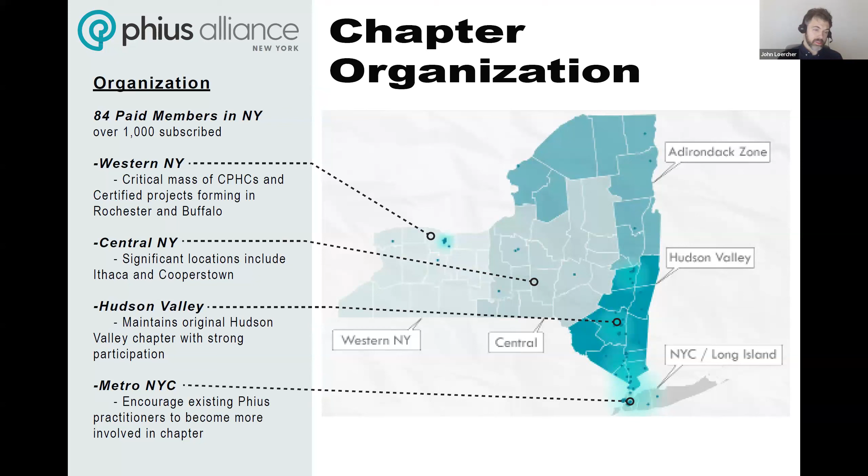All right, almost there, guys. This is our big announcement. You may have seen through the Passive House Accelerator, some other Passive House groups - Reimagine Buildings will be occurring in March of 2024. This happens to align with our spring quarterly meeting, and we're hoping to have an in-person event to supplement this 24-hour online event. This is a global event where we'll be hearing about Passive House projects from around the world. We are working with the Accelerator and NYSERDA to specifically program a segment devoted to New York State and the projects that are going on across New York State.

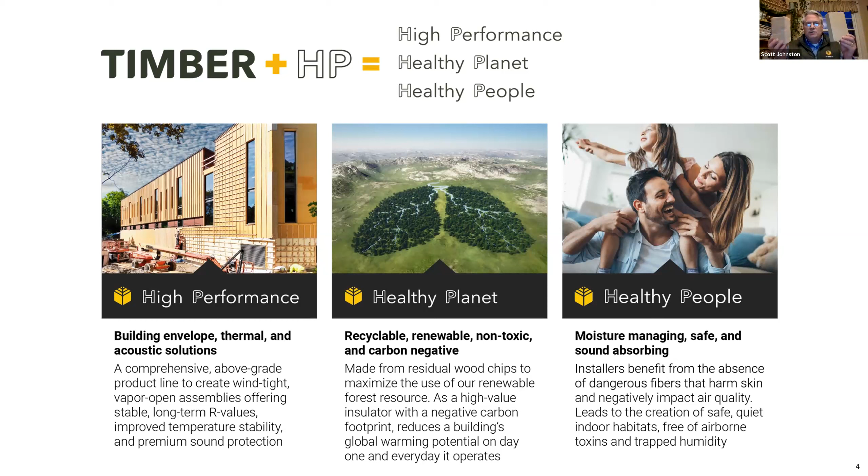Healthy people's a no-brainer, right? We build the houses as we do today - we've got to make sure that living space, that air they're breathing in, is of quality. The other fact that's near and dear to my heart is the materials themselves for the installers - they can feel it, touch it. There's not a lot of protection other than an SDS that tells you to wear a paper mask when you're cutting and blowing into the attic. It's an incredibly different experience for those installers than what they're used to today.

So that's really our go-to-market strategy. Here's where I'm going to be fairly quick because this audience knows this - you guys can speak to this. I really want to get into what the product looks like, when is it available to use, where can I buy it? But really, we all know this: 40% of buildings are contributing to the carbon.

And what I'm seeing and hearing as I travel to places like Texas, or the NESEA event down in New York City, or AIA, it's okay - we've been dealing with the operational carbon for years and doing a pretty good job. Particularly this crew here has done a fabulous job of getting that operational piece addressed. But what are we doing with the embodied carbon?

In that mission video that Paige will send you, there's a really cool dynamic between Josh and Matt. Matt says, I'm building this really wonderful building based on these design intents, and Josh, who has no dog in the fight so to speak, says, but I'm confused because that material you're using on the outside with the continuous insulation is very highly indebted on the fossil fuel side. It's a very interesting dialogue.

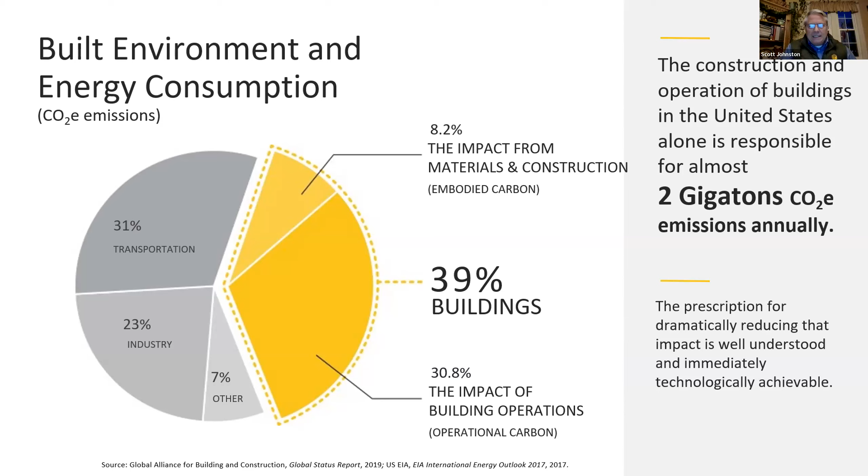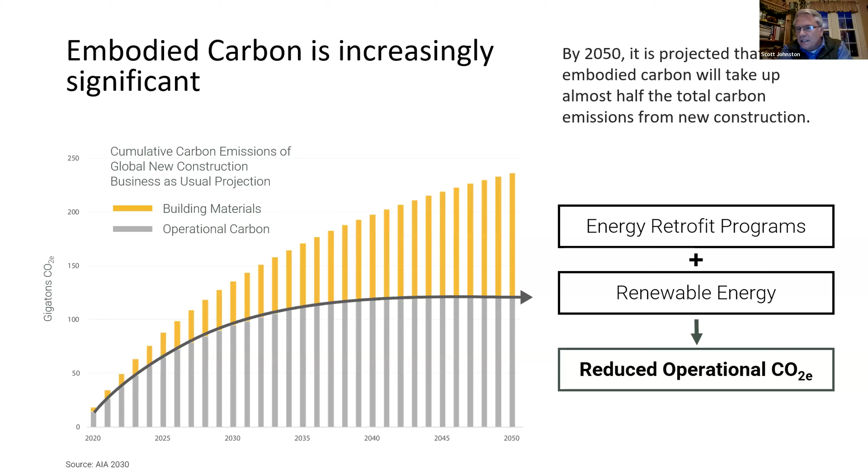Embodied carbon is something we need to think about, because as we continue to drive down operational consumption, what are we doing in all facets of the specification of a building? Here I speak to insulation. Is there something we can offer here in the United States that's affordable, hits the R value points, has the durability, addresses code, but also addresses embodied carbon? That's really what we believe wood fiber can do here in the United States. It's the second highest category that needs addressing, because it contributes quite a bit with regards to embodied carbon.

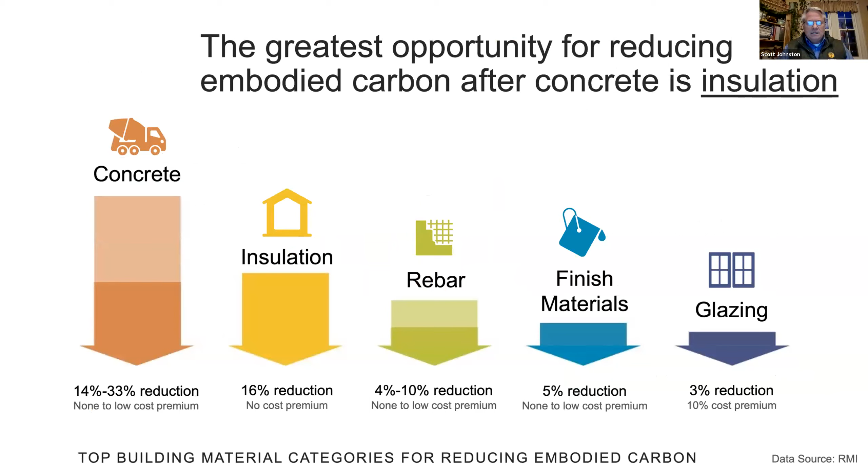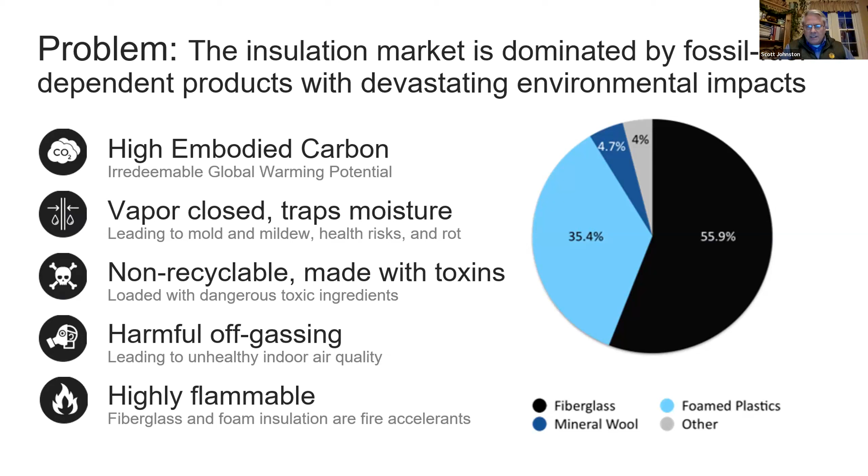This is just something to show you. I'm not here to get on a holier than thou piece, but in this category we use materials for all the right reasons—their insulation values, maybe it's something we're putting under a slab or up against concrete for durability, or commercial for non-combustibility, etc. There's many reasons. Again, wood fiber isn't going to cure all of it. Our wood fiber only fits into a certain segmentation of the market, but certainly in this category there's areas of improvement that can be had, and this is a significant contribution.

Most everybody on this call, I'd be shocked if you hadn't been following the European products for years. Many of you have probably utilized these products coming out of Europe and shipped into the United States. But to finally have wood fiber here in the United States gets rid of that boutique piece—we no longer need to ship it on a container, or worry about the impact in terms of getting it to the job and scheduling. The big thing here is, if you look at spray foam and XPS—there's certain instances where you need to use these things—but that's a 6 to 8 year operation to offset that embodied carbon.

So we're really excited to give some options out there, not just for folks like yourself. I want to make sure you realize we're working hard to make it affordable for mainstream. I'm really psyched to be working with some folks on affordable housing—their budgets are really tight, which is kind of fun. Also, and I signed a non-disclosure, we're working with a large production builder that's looking at this as well, which is cool.

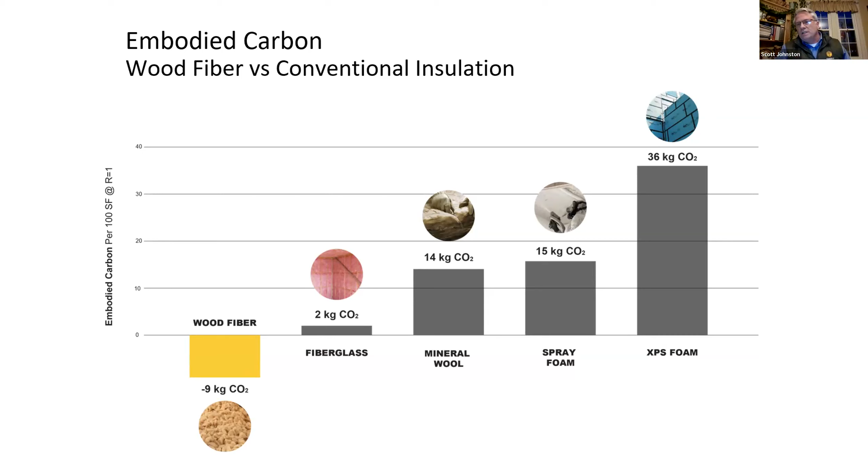Our raw material, like I said, is abundant. Sadly, all the paper mills—there's only 3 left, 16 at one point—all shipped off to other parts of the globe. Our equipment that was in our mill, and I'll show you photos of the mill at the end, all was shipped over to Asia. We imported our equipment from Europe, mostly Germany, to put back and be ready to make this wonderful wood fiber. Ironically, the same feedstock that made high glossy insert paper is the exact same feedstock we use, so we're able to reconstitute that relationship with the forestry industry, which is super exciting to us.

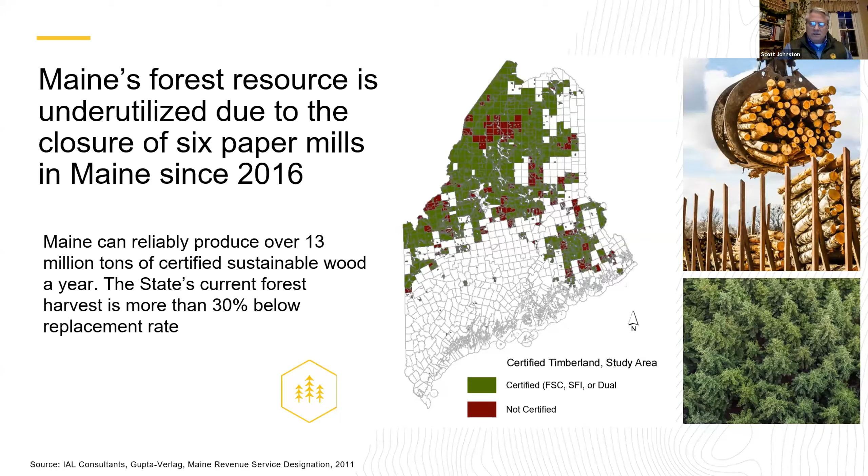Here in the United States, there'll be other folks besides Timber HP that get into this category, and I think that's fabulous—we need it. We have such an abundance of raw material in the United States for softwoods. Anywhere you see timberland, production facilities can be stood up to make the blown-in alternative to cellulose with our wood fiber, the batts, and the continuous insulation. So a great trajectory here.

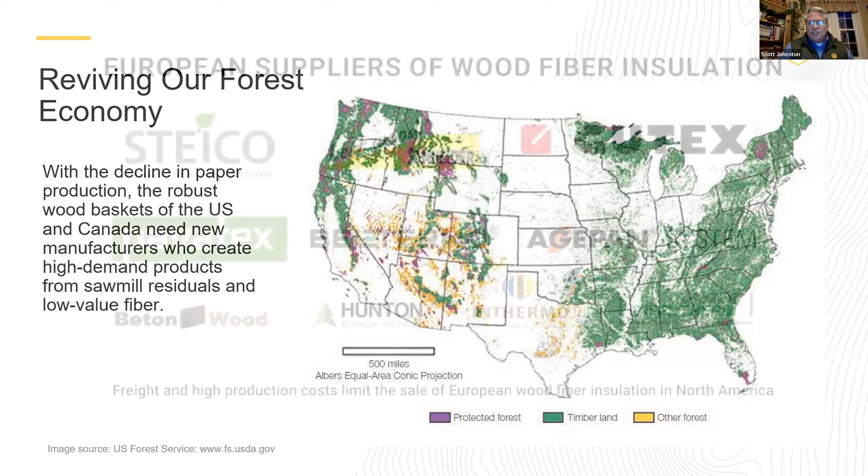John, I'm going to put you on the spot from a time perspective. I'm going to assume most of these folks are very much aware of these brands. I had a 2 to 3 minute video showing these products being installed, little snippets—be glad to show it, but you tell me if you think this audience is well beyond that. I don't think there's any harm in showing it. We have a little over 10 minutes.

Okay, good. Then I will do that, and we'll have a little jazzy music in the background, and here we go.

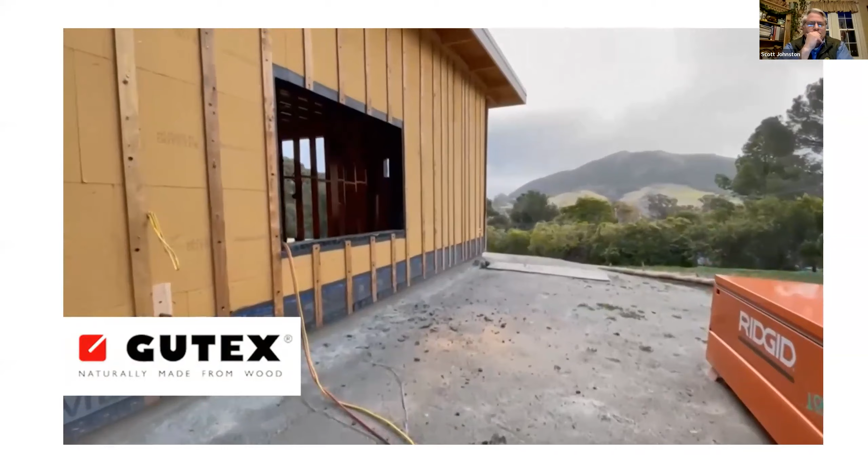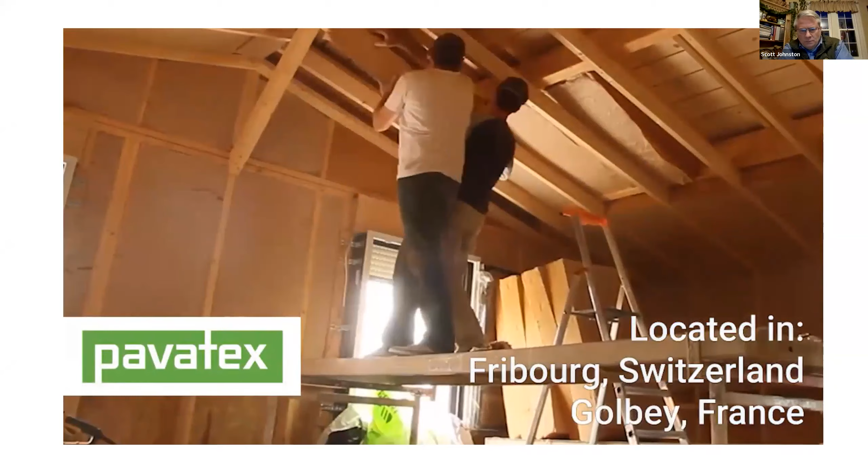Did that music play through for everybody? Yeah, it's going to be stuck in your head for a little while. But I think it does a fabulous job.

If we had more time, we'd ask what did you see there that was unique and different. The only thing I'll leave you with is I love the guy with the face mask just dangling from his neck. Typical guy, what can I tell you.

This is the essence of the manufacturing. I came from the wood window and door side, and there's a lot of complexity to it. The engineers would kick me for saying this, but really, if you look at this piece for wood fiber insulation, it's pretty straightforward.

The cut section they're seeing, somebody upstream is going to use that tree that's brought to their facility, and they'll debark it for bark mulch. They'll yield as much off that tree as they can for dimensional or decorative trim. What they've done in the past is sold that chip off to the mill, or it might be burned off in biomass. So there's an abundance of this softwood species up there for us.

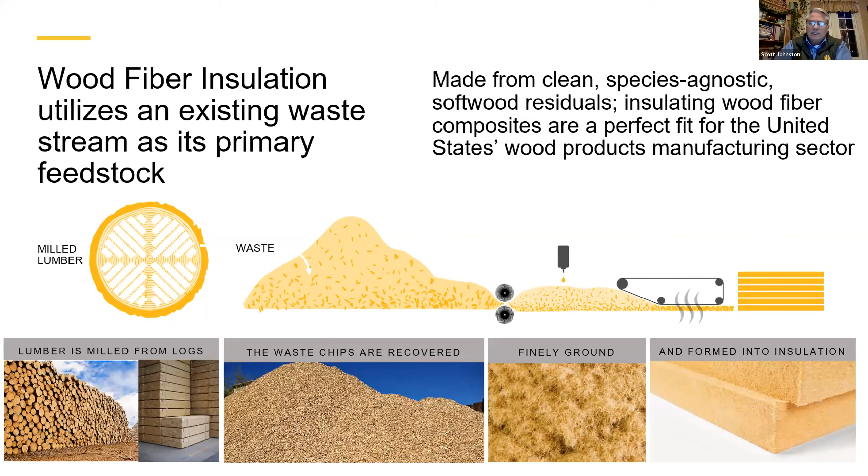We utilize it. The trucks are blowing past our facility because we're right in the sweet spot for the forestry industry. We're going to add some additives, we'll talk about that briefly, but it's a pretty straightforward process. Carbon storing, high performance, recyclability, non-toxic, safe.

I'll say this because this is a sophisticated group. We're going to immediately get online for the production. When we make the fill, the batt, or the board, we're first and foremost going after ASTM and code compliance. Then the second tranche of work, which takes 9 to 12 months, is life cycle analysis, declare label, all of that's coming, so be patient with that. But that is a no-brainer for us, we've got to do that.

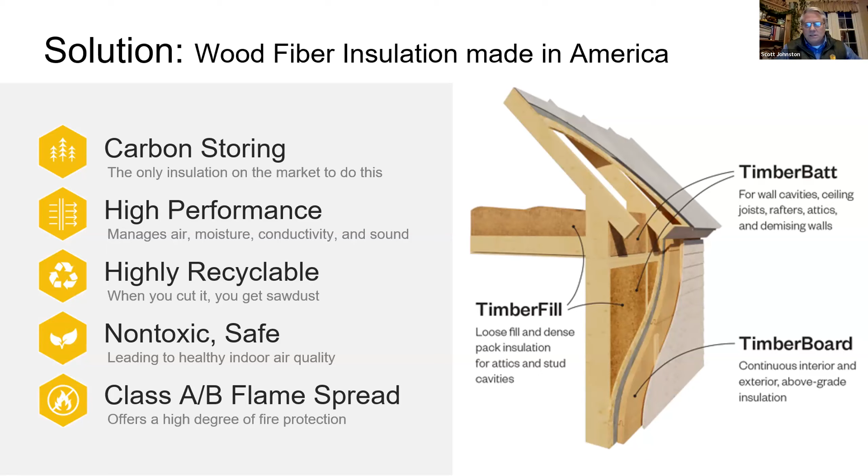And then, of course, Class A, Class B, we are for both the fill and the batt. We're an ASTM E84 flame spread A. So primarily anybody doing combustible type 5 residential, good to go. We're also going to be able to be in type 3. Just be mindful of that NFPA 285 and less is where the sweet spot is, but also into the CLT.

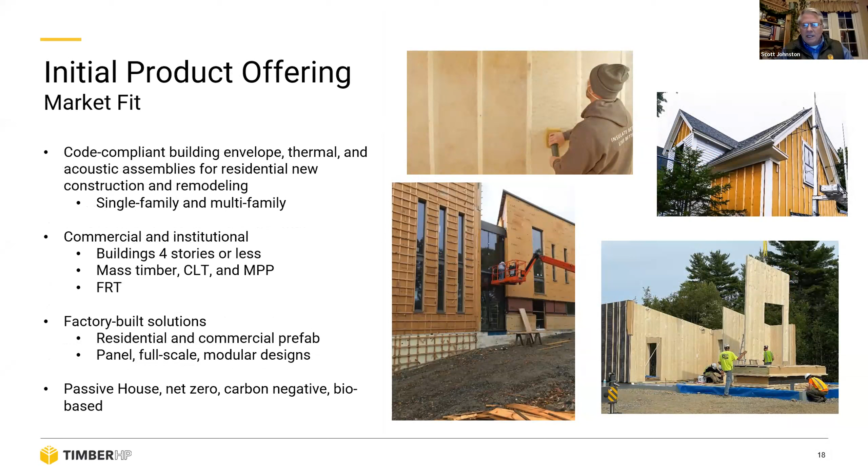We'll be able to produce in the summertime. We'll have a board for you as well, and I'll get more detailed on the timing of that. Timber fill is just a straight up 100% alternative to cellulose. We are in the market now, good to go for your market.

We've got Cameron Ashley. That name may mean nothing to you, but the importance is that we've got a distributor selling it to all the large installers that come out as hired guns to blow in cellulose on your projects. They all have access to us, so lots of work has been done there. It's really a one-for-one — if they've been blowing in cellulose material, their equipment works. We've got training videos, spec sheets, all good to go.

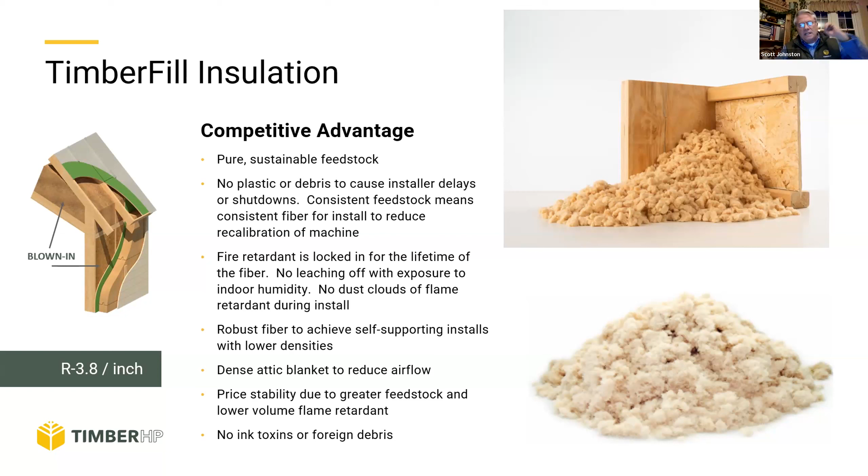But we're only using borate — a liquid borate — infused into the wood fiber. So when they're blowing it into an attic space, it's not coming off the product. 3.8 per inch in a dense pack wall. I'm going fast because of time.

The bat is exciting. We have the equipment up and running, and we're looking to launch the bat in January. We're going through the final code compliance, ASTM testing, R value and such. So it's super exciting — this piece that I have was made in the plant a couple of weeks ago.

R4 per inch, again, all softwood species. The only additive here is borate, as we mentioned, for fire, bugs, and water, and we're using a little bit of a PMDI resin, which is a polyester piece. We're looking to eventually get rid of that. We looked at bio-based adhesives, but they require more fuel to make than the polyester needs. It's a bi-component process, like a huge toaster oven, and we're trying to infuse that into the product to get the density and the R value necessary to hit those R value targets. That's it, so it's wood and those other two components.

Very easy to work with. We have all kinds of cutting tool suggestions, and we'll actually have those readily available at the lumber yards. I'm not wearing gloves, you can just brush it off. I do recommend you use a paper mask when you're cutting quite a bit, but we're really excited about that.

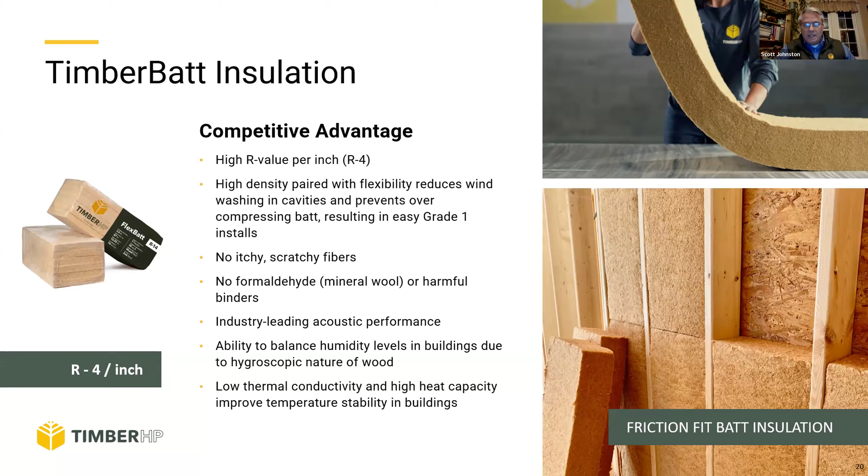The board is a bit trickier, a lot more things to do to make that. We have the equipment in place, our contractors are bringing it to life now. Q1 will be bringing it to life, producing it and slowly getting those testing parameters done. We're hoping, praying that we're looking at a spring time frame for this.

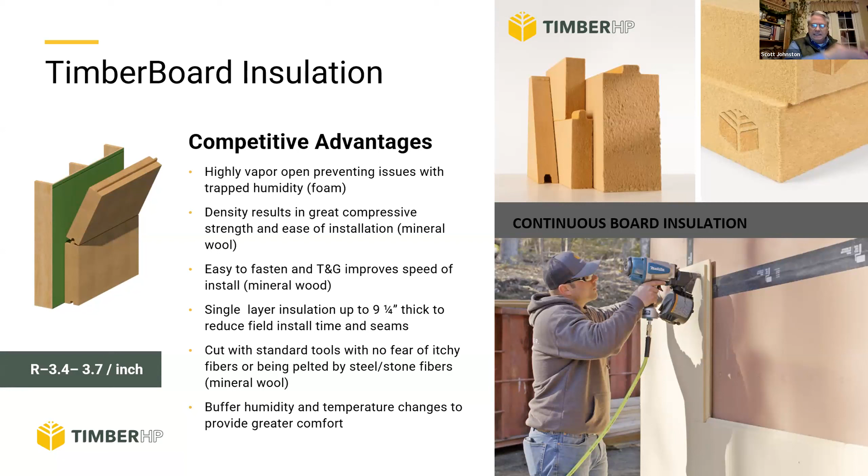All 3 of these products have 3-part specifications on our website. It's on ARCAT. We're working with a whole host of designers, architects, engineers, and developers, and we already have a lot of these products in their specifications, available to you right after this call. All the products we're doing are really nailed down based on codes, so it's plug and play - what's my cavity need to be, in New York I need this, what's my board - all the data we have should be very straightforward for you.

Thermal management, I mentioned this earlier. Really, that middle shear, that sheathing in the middle, that white piece there is the outer plywood or OSB. That's what you're going to continue to do, what you've done before. What does my shear strength need to be? What's my preference for my WRB, my water, bulk water, air, etc. The exterior board is purely thermal. We'll have a lot of suggestions for you. We have a manual in design now, Joe Lstiburek is helping us with that. But yeah, that's the open assembly that we talk of.

The wood fiber can hold upwards of 15% in weight and still perform at the published R value. When it dries out, it dries out without any degradation, so it's very, very durable. And it's vapor open - we have about a 40 to 70 perm rating with these various products.

Obviously on the outside we treat that a little bit differently. There, we're not putting borate in, we're using an MDI resin, which is what the OSB panel folks use. That's for durability, giving us really great compression durability. If you've ever worked with mineral wool and put your rain screen on, you worry about the torque - here, this gives us resistance. So that trade doing the cladding work, we reduce the telegraphing concern because of the PSI durability.

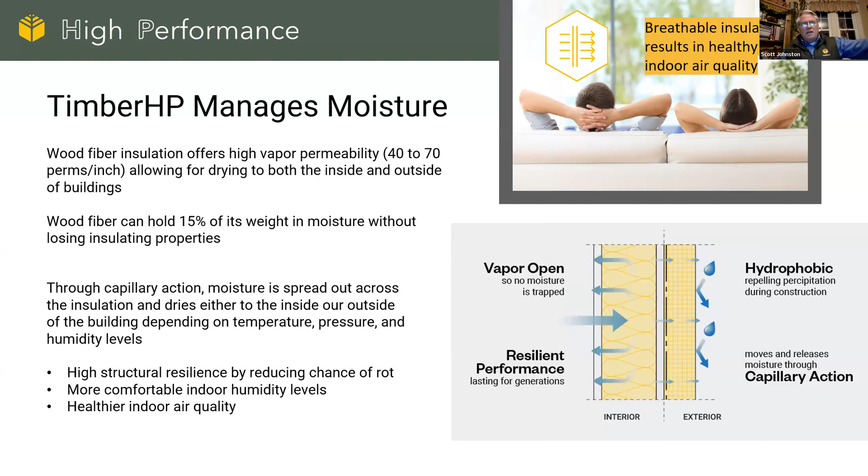And then we're using paraffin wax because we've got a 6-month exposure rating on that board on the wall, and 3 months on the roof, and then it's monolithic. So if I take a claw hammer and chunk out a section of this, not to worry, as long as it's not catastrophic, the MDI and that paraffin are still there, so as it's still being weathered, we haven't compromised the product.

Paige has been having a ball out there, getting on some job sites, doing a lot of training. You might go to some retailers and bring up Timber HP products and they might go, what? There's still a lot of work at that level, but Paige is who you want to call to triangulate on where's the closest source for me. Our goal for everybody on this call is independent retailers.

Not everybody's going to jump at it. There's certainly, as you know, a lot of folks that have been early adopters for other products that you procure, but we want to work through independent lumberyards and those other distributors that I mentioned that do the blown-in insulation.

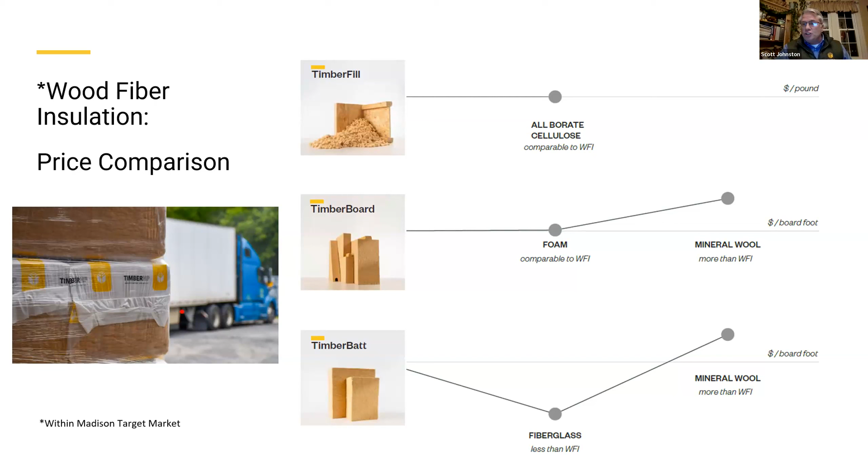But that's not who we play in. We play against the mineral wools, and I think you'll see that we'll be in good shape there as well. So we're really excited about that.

Just a couple of factory photos, and then I'll stop because I know you have a lot more to do. That's the rendering upper left. There's another drone of the actual facility when it was bought.

That river that you're looking at is very angry right now. Good to report that no damage done to our main plant. Some of our annex buildings did take some flooding and such, but all of northern New England, and you guys probably in New York too, I mean the last 2 days were pretty painful.

But we'll take back this 400,000 square foot facility, and in 2016, 150 people lost their jobs. At full production, we'll be up to 125. We're at about 75 now, and of course the impact locally is going to be fabulous.

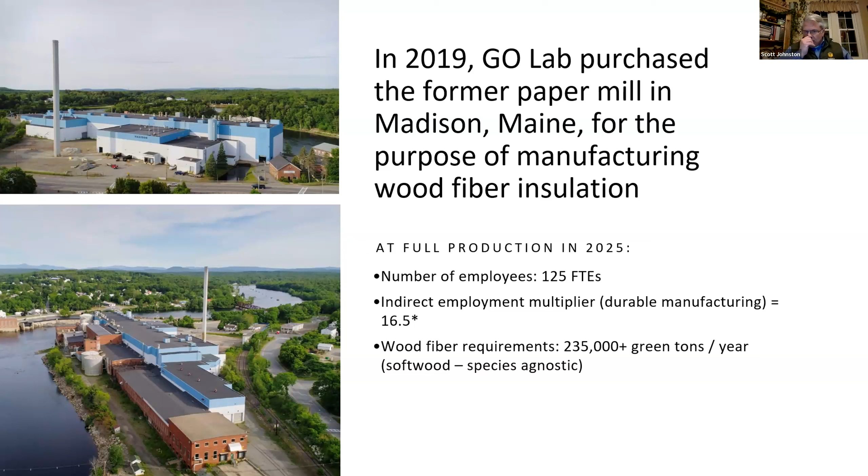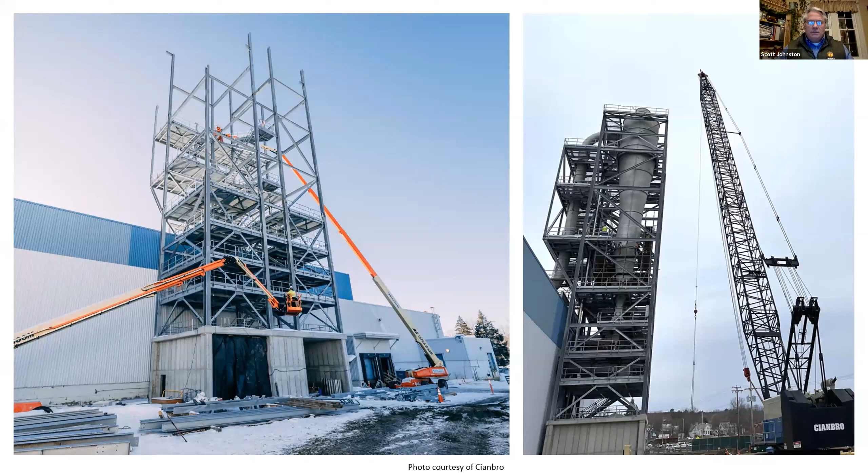So here's some of the construction work. Stantec Engineering repurposed this mill. This was built in 1986 by Cianbro. If you're not aware of them, they're really a great firm here in Maine, and they're growing. But they are repurposing the mill that they built in 1986, built off Stantec's work.

And this is kind of a closer photo to what it looks like today. So it's a big operation.

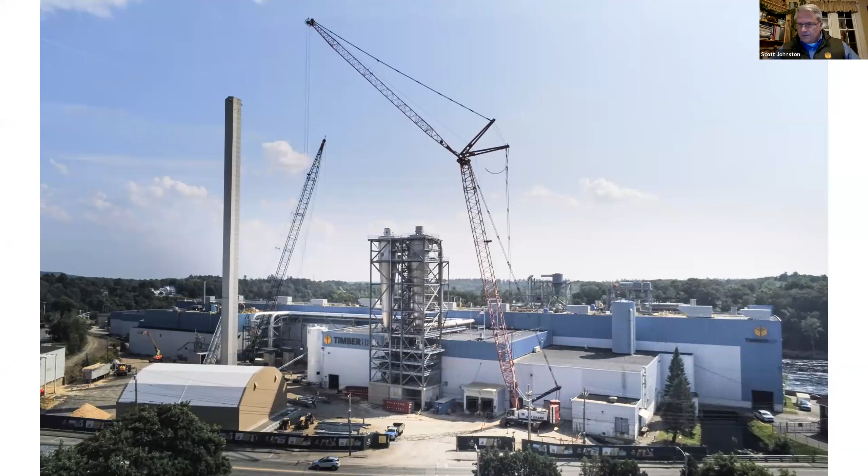And if you're ever up in Maine, call us. Oftentimes, I think the first month or two, give us a bit of a vacation. There's a lot of finish work that needs to be done, but we will entertain tours. And I know you're a long way from where we are, but maybe if you're vacationing up here and you give us enough notice, we might be able to get you involved with a tour.

But this is the last slide I'll show you. Well, actually, 2 more slides. This on the left is the batt machine. That's that large toaster oven, if you will, that's conditioning that material, getting that bicomponent into the material to make sure we're hitting the R values. To the right, you can see the batt line, but in the distant view, you can see the end line of the board plant that's there.

And yeah, that's it. I tried to squeeze it in 30 minutes. No, Scott, you did perfectly. We're still right on time. Thank you so much for that presentation.

We can take a question or two if anyone wants. I see there's a lot of chats out there, so maybe Paige has been responding to some already. Paige, is there anything critical that comes to mind? If you want to go over it, it was asked about a suitable substrate for stucco finish when using the timber board. That detail will be highlighted in our install guide, but I wasn't sure if it was worth touching on now.

So you allow people from away to come onto these calls to talk about that application? I'm kidding.

It's very similar if you've used a zip system and you're putting the two layers on, no different with us as well. That still needs a little bit more vetting out, but yes, we will provide best practices for that application. We can do it with the timber board for sure, but I'd rather be working off some detailed drawings to show you that. We've all learned, haven't we? We need to be very on point to make sure that condition is done properly. We'll have that for you.

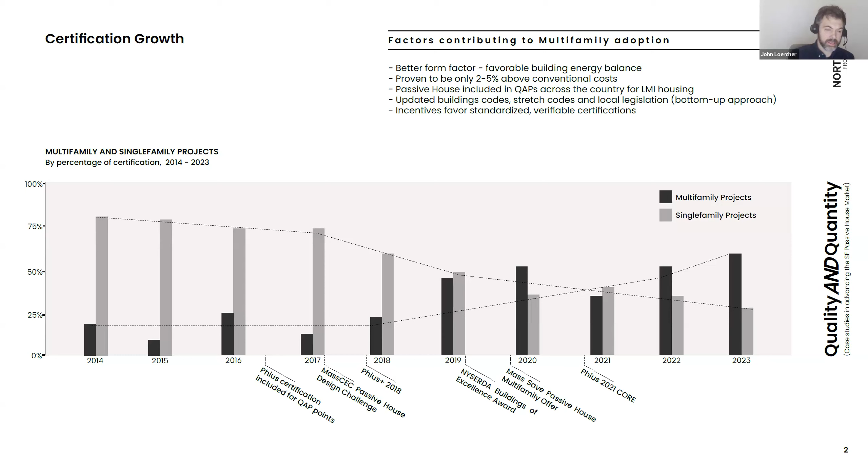Meanwhile, we have the single family market, which is still staying pretty consistent. But in this chart, we can see the percentages started to be shuffled up a bit, and the single family market is a smaller percentage of total certified buildings. I myself happen to work on mostly single family projects, as a number of you probably do as well, and we really want to find ways we can find the same amount of success within the multifamily market and apply that to the single family market.

So the intent behind this presentation is to encourage ways that we can make some more waves, playing off this analogy of the drop in the bucket. We have about 230 single family projects as of 2023 that are Phius certified. If we look at the 2022 census survey of new construction, we have over 1 million new single family projects. So the percentage is even worse there.

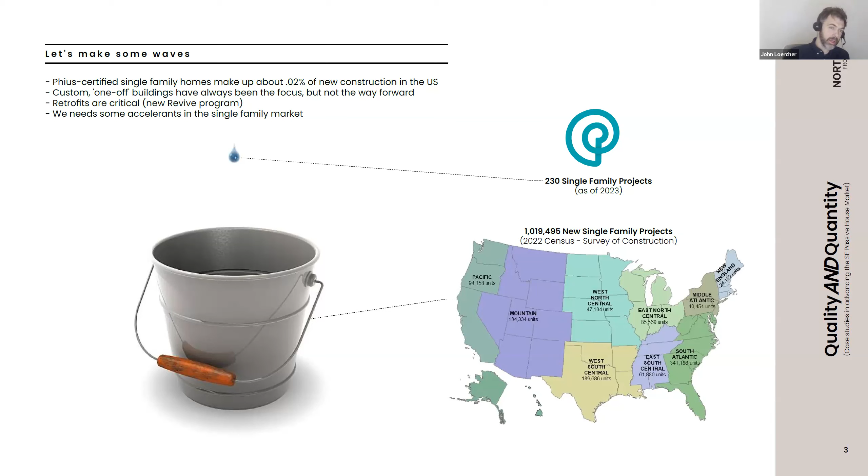And we want to, here at the New York Phius Alliance chapter, make passive building mainstream. So how do we start going about that? These are a number of accelerants, as I'm calling them, that will start to show up over these different case studies. So, alternative construction methods.

Prefabricated options, both modular and panelized. We're seeing some of the first modular Phius buildings going up actually right in Westchester right now, Lamora Senior Living. CNC fabrication in order to minimize offcuts and fabrication waste. And then some exciting new materials and products, very much like what we just saw from Timber HP.

We have alternative project delivery methods, integrated design development, design build or integrated project delivery methods, and then on-site training and certified professionals. So having the ability to see the big picture all the way from schematic design to the final certificate of occupancy in the building goes a very long way in helping make sure the single family market is delivered with more efficiency.

We have a number of Phius protocols for developments as well. Phius offers ways to make certification for multiple buildings a lot easier. We don't have to go through an individual certification process for every individual building in a larger development. We have a cumulative project review process where essentially you identify your worst case building, model that, certify that, and then certify the rest of the prototype buildings off of that one.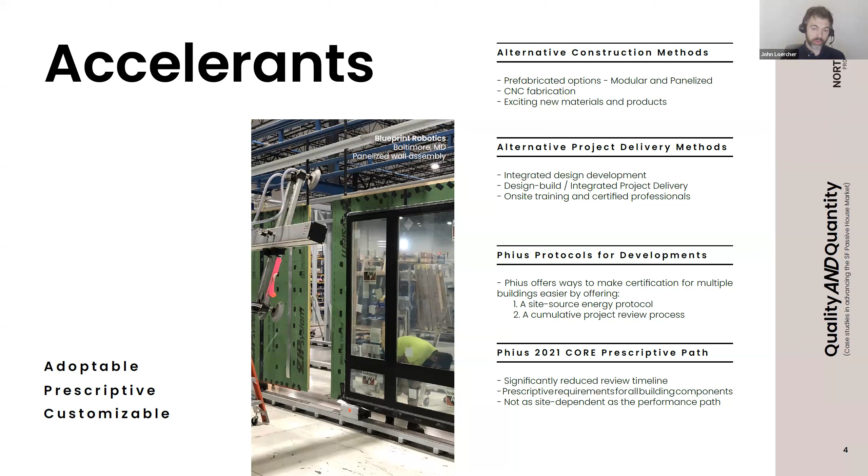So these are our 3 case studies. We're going to be hearing from Passive to Positive first. We have Andy Allwine with us today. He is working with RODE Architects in Massachusetts on 17 individual residences integrated with complete site design and targeting Phius CORE certification. The second speaker is going to be Matt Bowers with AUROS Group.

This is a project just outside of Pittsburgh called the Rachel Carson Eco Village. It's very much in the prefabrication stages right now, and I'm looking forward to getting some highlights from Matt on this one. And then our final presenter, or case study, is going to be Stephanie Bassler, North River Architecture and Planning, on the Phius prescriptive path projects and the Flex House series that Stephanie has worked on.

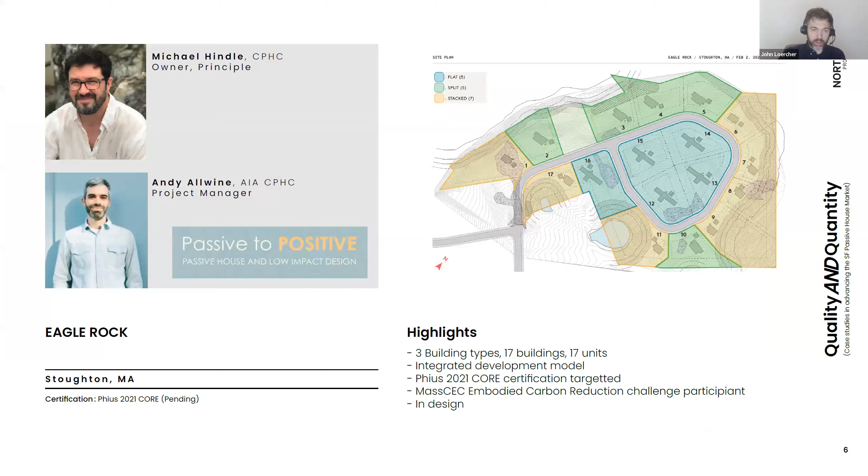So I'm going to skip through these in order to just make some time for everyone to get into it, and I will come back at the very end to help moderate the conversation.

So Andy, I believe you'll be going first, and you can share your screen or I can share for you, it's up to you. Oh, I can share. Let's go. All right. Yep.

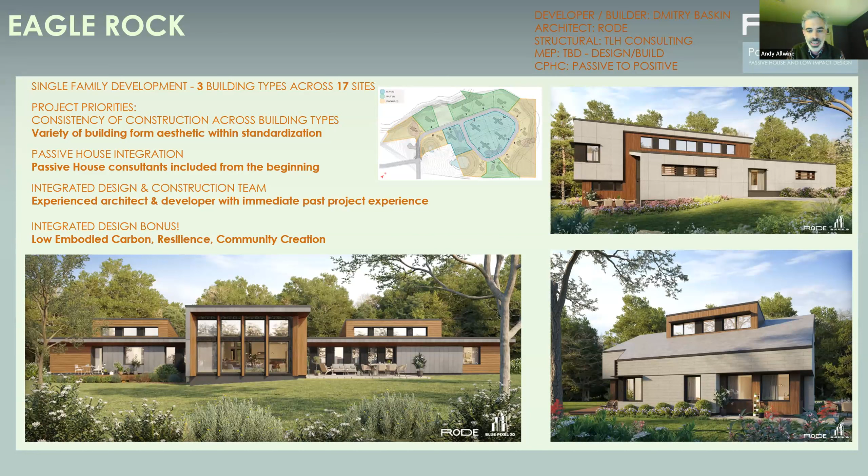One of the benefits of that early team dynamic on this single family development was the ability to determine passive house principles early on. Put simply, we're trying to put the passive back in passive house and really bring those principles to the fore. You can see the photos here, and we have some even earlier, just on site plans. But we were, again, in the room from the beginning when looking at building massing or site orientation, or the interface of the foundation in these various sites.

This is in a really wooded, naturally beautiful area, as you'll see in a second. The architects want these large viewing windows in different locations, so working with them as to what the best location for that is, and then coupling that with shading where needed.

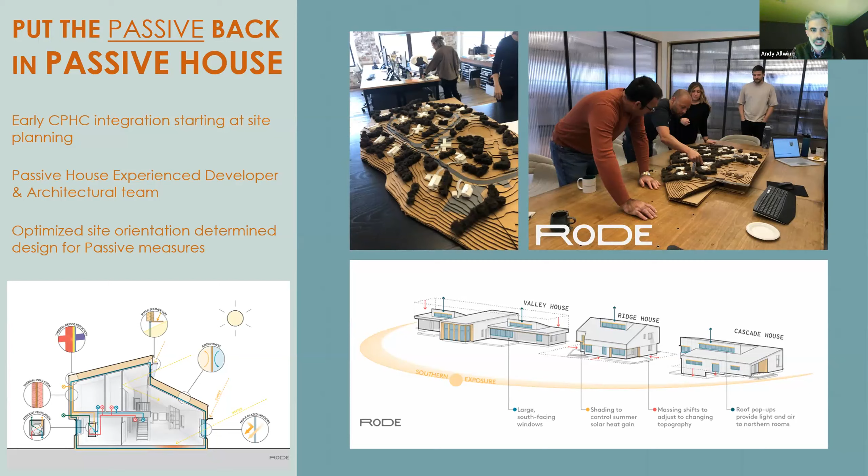I'll skip to those site images, because these really start to represent some of the early challenges that we saw pretty quickly. Upon our first site visit, we could see that there's a huge variety of landscape per site. There's 5 of one type of building, 5 of another, etc. So when you're trying to certify for one building type, but you don't necessarily know what the landscape around it might be, it makes it a challenge to figure out how to go about that process.

As John had mentioned before, it really does come down to a couple things. One is to standardize as much as possible, and that included site orientation. We were able to work with the architect, even though the topography varies throughout the site, so that all of the instances of every building are oriented within 15 degrees of south. That helped.

To overcome the landscaping unknowns, we're trying to design with as big of margins as we can with our passive house criteria for ease of pre-certification, and also allowing for a decent sized buffer to account for that variability, and of course the unknowns of construction.

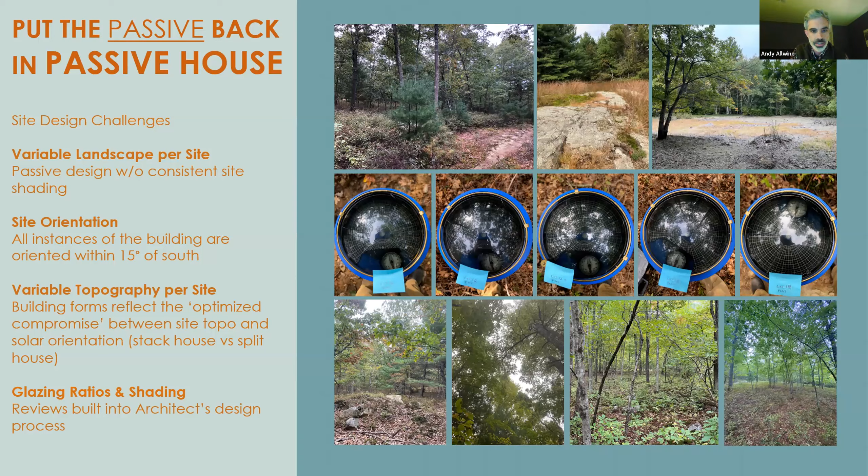Looking at going from the site to the buildings, we had 3 different building types. We did a quick-ish SD or conceptual level energy model for the 3 different houses to determine the worst case scenario. What you see here represents that worst case scenario—they call it the flat house. It's really long, elongated, a linear layout. It's the largest conditioned floor area per occupant. There are large southern glass walls we had to account for, and it's very open on the inside. The architects wanted to keep it that way. So there were just a lot of challenges that went into this house design.

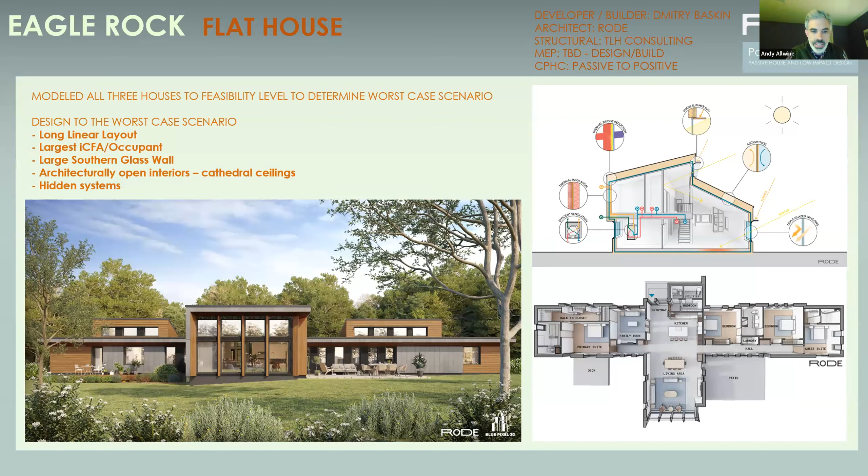Not only looking site by site, but the different house designs for certification, to go with the worst case scenario. We're starting that pre-certification process with Phius here this month, and we'll go through reviewing the worst case and then all the iterative designs following after it. Some of the criteria we're looking at, as everyone on this call is probably thinking, are thermal and airtight performance. The developer will also be the builder, so we're able to have really early conversations about constructability and the team's familiarity with the assemblies.

They had this prototype project I mentioned of the 3 houses, and I know they don't want to make this another prototype by changing too much of it. But of course, there are differences between the PHI and the Phius standard, it's a different site altogether, and the house designs are different. So there's naturally some variation occurring.

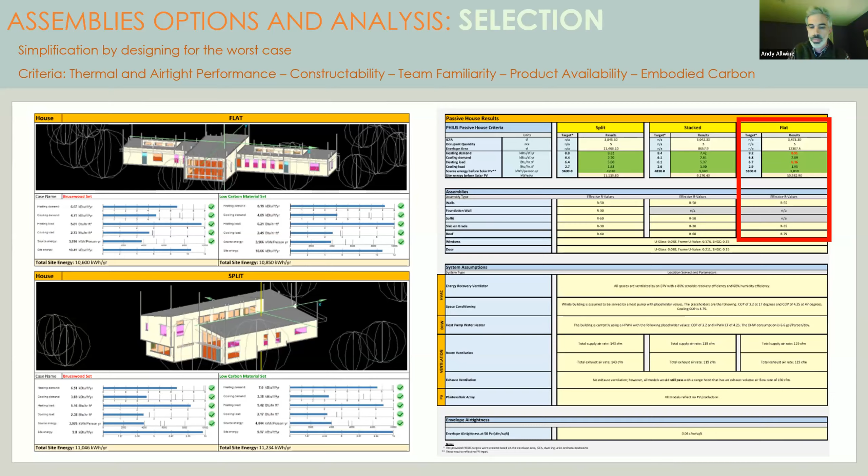Then we were able to look at embodied carbon a bit, and we'll take a look at that now. This is one of the two topics I'll show that we were able to bring to the table because of that early project integration. Everyone on this call probably knows the importance of reducing embodied carbon. As a practice, Passive to Positive works to incorporate this level of analysis into all of our projects and present this to the team. We'll often have these early conversations, and I feel like design teams are interested, but it's still a little unclear what really needs to be done, what kind of impact different steps might have—not even to mention the costs or perceived costs associated with it.

A lot of this was changes to the insulation products—switching out from a higher global warming potential foam to lower GWP products like the wood fiber we just saw, or cellulose. We were able to bring this to that early conversation and say, look, here you go, you can get up to a 70% reduction of embodied carbon. And this is at a high level analysis—we haven't even started to fine tune it yet. So that kind of changed the direction of that initial discussion from something a little nebulous to something more manageable.

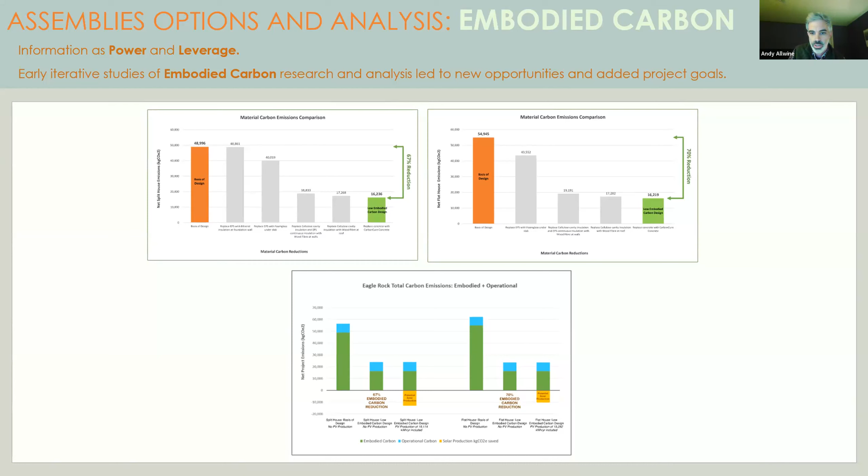Having that visible made a positive difference. There was a lot of motivation then, and the team really embraced the goal of reducing the embodied carbon where possible and as much as possible. So it's now one of those criteria we think through when making design decisions. Once it was embraced, the goal is that we can start to fine tune it and look at individual systems.

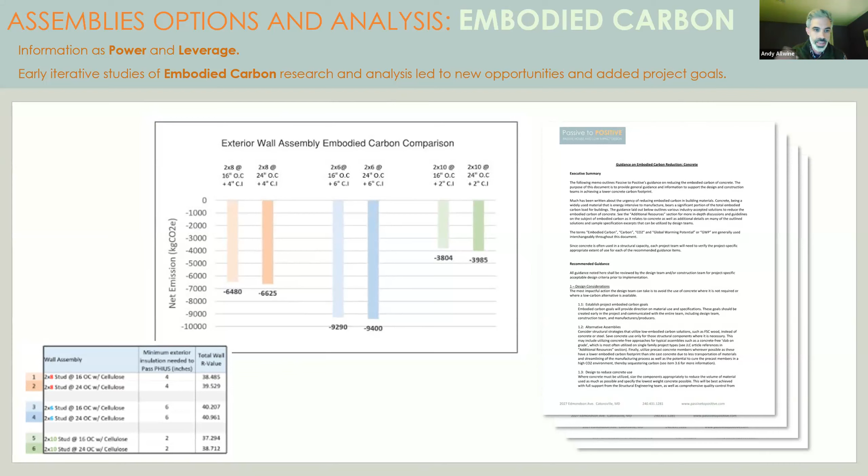I won't go into too much detail for sake of time, but this is the exterior wall assembly, an embodied carbon comparison. Now we start to layer in structural, thermal performance, as well as embodied carbon. On the right is a guidance document we have that we can fine tune for each particular project. This one happens to be on low embodied carbon concrete, which helps guide teams through the design and ultimately the specification process.

Okay, let me speed up a little bit here. I'm looking at the time.

The next package up would be net zero, adding enough solar to hit those net zero targets. The next resilience package would be that same solar, but now balanced between PV generation and energy storage, so you're actually building in resilience. And then the ultimate package would be enough solar to hit both net zero and resilience.

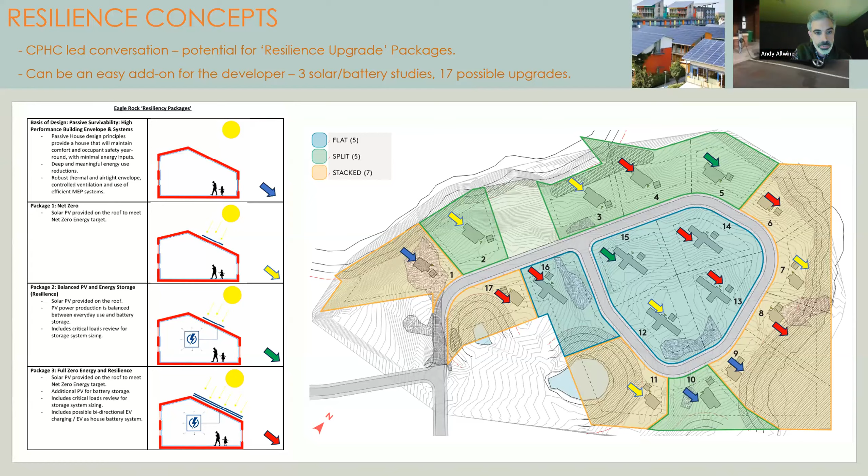potential profit coming in. All right, very quickly, let me skip ahead here. This was a discussion the developer brought to the table about how to build community, and I think there's a lot to think about. I'll zoom forward here so we can get to the next.

What makes the communities unique? What ties these houses together? How is it marketable? I think there's a lot to talk about, but our takeaway was you have your architectural elements, the way the buildings and community look. We have our low impact, conservation-first environmental ethic that could go into it. But I think there's a lot that goes into this resilience that could be part of building community, whether through health and comfort or the resilience potential for resilient homes.

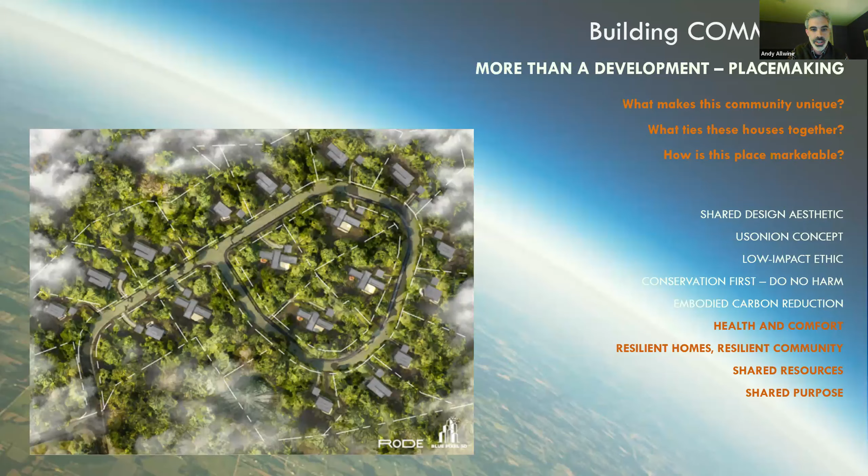So with that, I will end. Thank you very much.

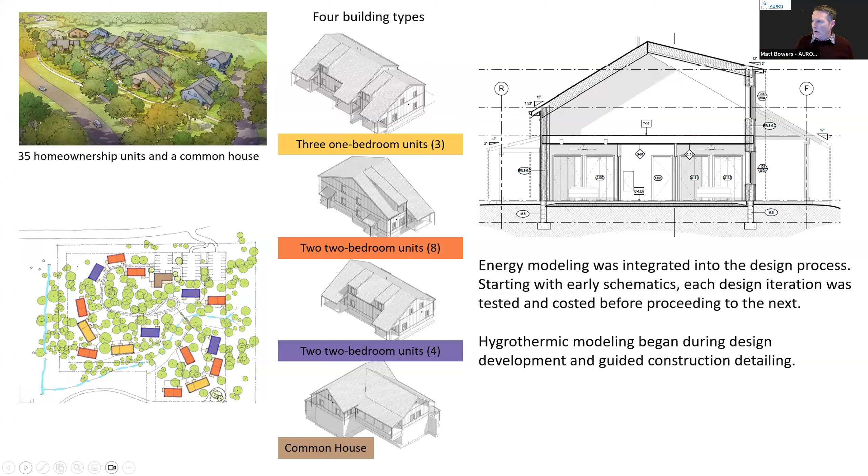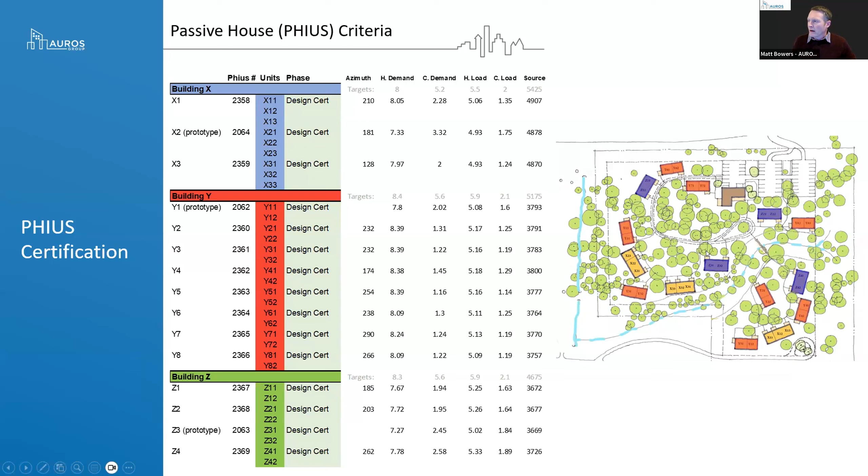Here's our energy modeling slide, right? This is what everybody's super interested in. All of the buildings are meeting our demand targets, okay? And so these are kind of how the numbers are made up. We've got our X11 and 12 combined, I think it's over here. But anyways, you can see the village is interspersed with 2 and 3 unit townhomes, with the common building pretty centralized, again bringing forth that inner community, with common parking, and more or less a walkable path to get to each one of these units.

Now, what this project went after was panelization. Blueprint Robotics was brought in, and actually all of the panels are already built, sitting in the Baltimore warehouse right now waiting to be delivered to the site.

If you're not familiar with what Blueprint can do, they're a panelization company. They send pre-insulated walls with windows already installed, to whatever R value you're trying to achieve. In our case, we were doing a 2x8 wall with 2 inches of continuous wood fiber insulation, and an insulated service cavity that's a 2x6 wall. Then, in order to meet our R value with hygrothermal analysis baked into it, we ended up going with closed-cell foam insulation in the vaulted ceilings of these units.

One of the really cool things Blueprint has been able to do is build the HVAC systems into their panels. What we're using in this project specific to mechanical systems is an Epica heating, cooling, and ventilation unit. When they can build a pod and have that pod delivered to the site with the Epica system already there, and all the ductwork already installed, you can get an idea of what that looks like here in all of the panels. Then we're connecting them on site, and we are ready to go.

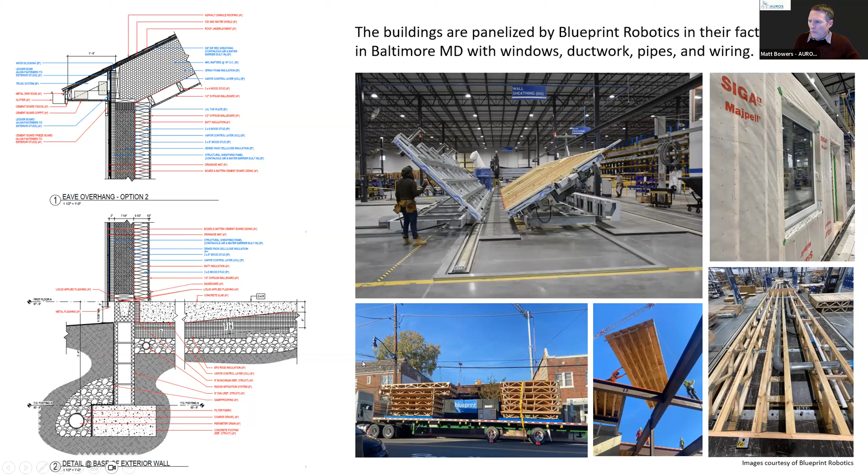And on top of the ability for them to panelize all of the systems, one of the really important things to consider here is when we're able to build things using 3D models and CNC machining, we're going to be able to reduce our waste, right? We're going to know if we should be cutting that 8-foot 2x4 or that 10-foot 2x4 to minimize what our waste is.

Also having factory installed windows and doors, building it in a controlled environment is really, really important for quality control. We're able to replace a lot of CMU that would normally be used on a site because we're able to utilize CLT.

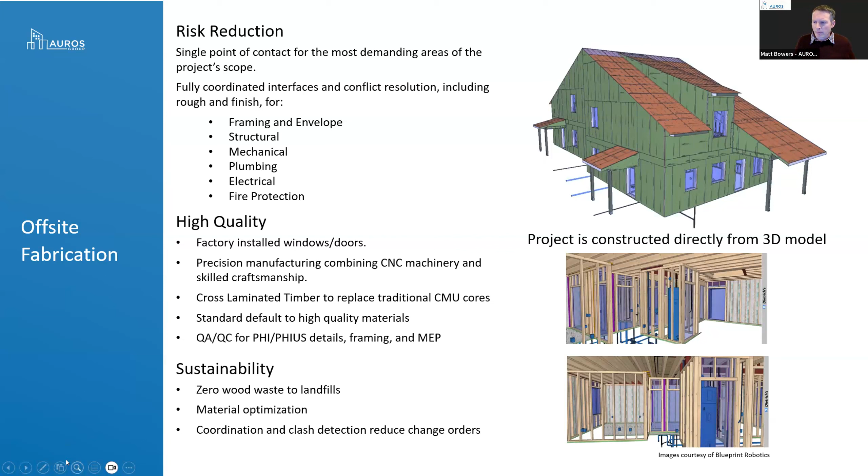And we're also reducing the impact on our landfills by having much less waste, and the waste that they are generating is being reutilized in other ways. And so that allows for a little bit more material optimization. And when Blueprint is able to have their hands on as much of the project as possible, the coordination and reduction in change orders is also super, super critical for cost savings.

Now, as part of what we're doing as the AUROS Group in this project is instituting smart building infrastructure. And many of you may have heard of a building automated system, or a BAS system. What we're trying to do, or what we have done, is integrated a building automation system, energy meters and sensors,

water meters and sensors, indoor air quality and security systems, and taken all of those operational technologies and that data and overlaid it with simulation.

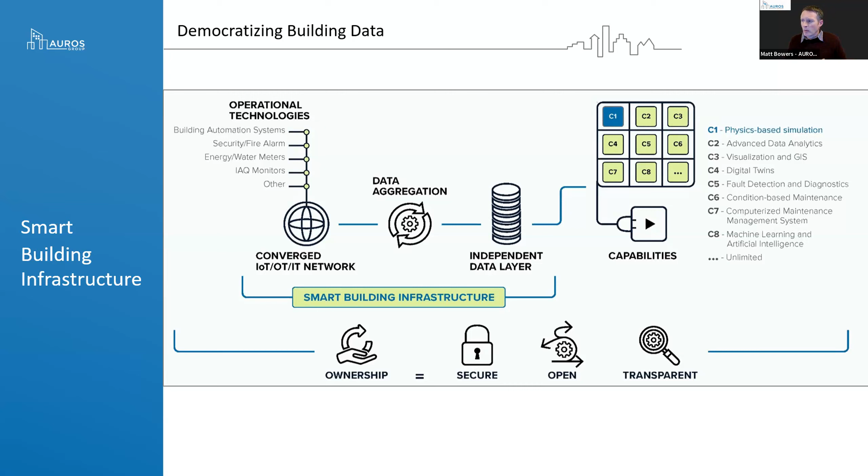And now what we're able to do, using all of this data that we're able to generate from within the building, we're going to send all of the information from our meters and sensors, from our air quality meters, and we're going to send it to a JACE. And this JACE is then going to be sent to a data management system, or a digital twin.

And now we're able to overlay simulation from an 8760 model, right? Typically we'll use IESVE, and we can determine if the building is operating the way that we're expecting it to. It's one thing to say, yep, we're building a Phius certified building, and then never look at it again. We don't know if it's performing to the heating demand number, or what our site limit is. We're modeling to be under that limit, and as long as we're under that limit, we're happy.

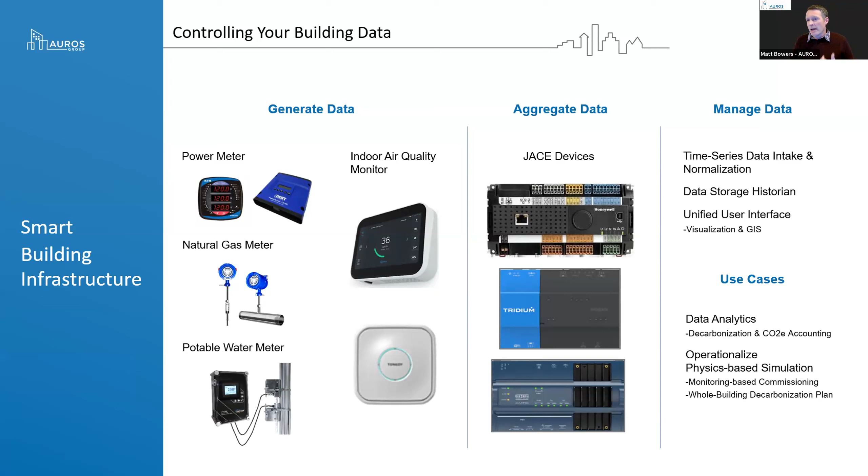But we still don't know if the building is performing as well as we designed it to. And so now what we're able to do is overlay our simulation data with our air quality information, right? Because our 8760 model is going to show us CO2 levels within each space.

And we're able to overlay the actual energy use of the building, right? How much energy is our heat pump using? How much energy is our water heater using? How much energy are our lights and our plugs? A lot of those are, at best, educated guesses in our energy model.

And so now we're able to determine, okay, why is our heating system not performing the way that we had modeled it? Did we model it correctly? Or maybe the refrigerant didn't get charged. Maybe the ventilation system filters are dirty, right? Maybe we need to look at some other aspect of the building to make sure that it's performing to its potential.

And so that is my house, okay? So I've instituted this type of system to my house, kind of as a test case. And so I've got meters and sensors on my Sanden water heater, on my Ephoca ventilation system, on my heat pump dryer, on my induction stove.

And so we're able to now measure how much energy I'm using in the house, and then we can compare that to an IESVE model of our house and see the results side by side to make sure that my house is performing, or the building is performing the way that it was designed, not necessarily just to be under a threshold of certification criteria.

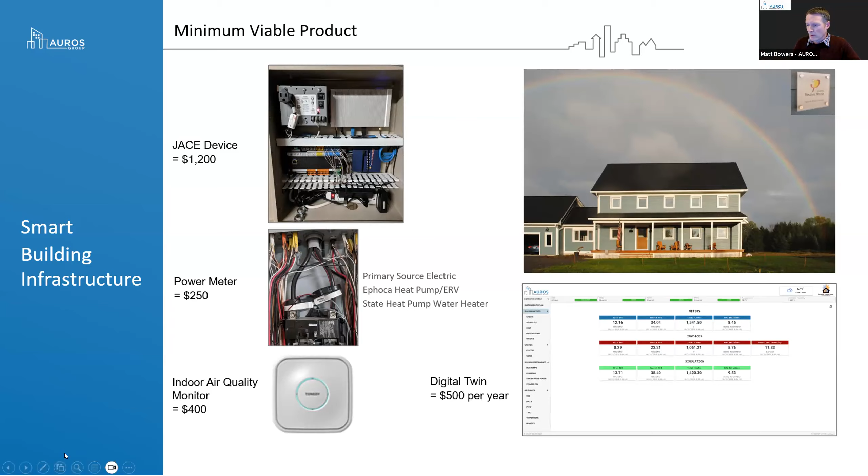This type of informational technology is being deployed at the Eco Village. As the building comes online and we gather more information, we'll keep everyone posted on what we learn, along with any lessons on process and the like throughout the life cycle of the building.

So with that, I will pass it back over to John. Thanks a lot, guys. Thank you, Matt. That's really great to see.

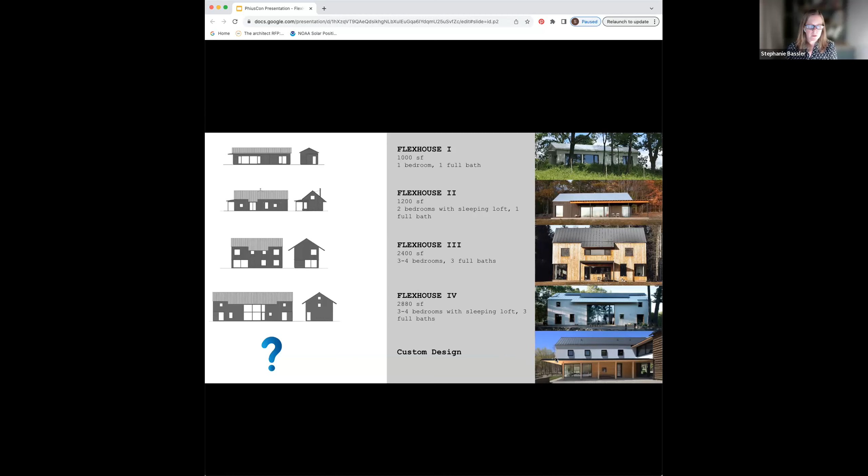And then we had some custom designs that utilized similar envelope, structural, and mechanical system solutions that were divergent from this more simplified footprint and massing of the Flex Houses.

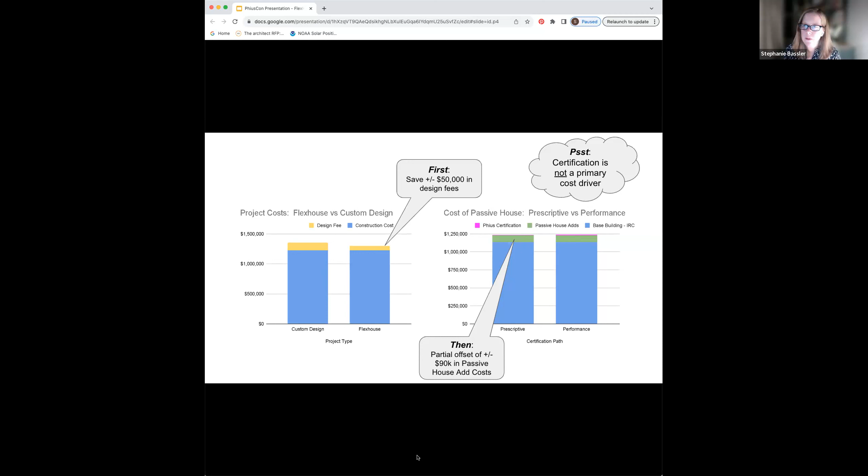We utilize standard construction practices for budget reasons, and in order to access subcontractors of all stripes, there is a fair amount of training of subs that has happened, but we're not asking for anything really far outside the norm, other than the airtightness monitoring, which requires a level of oversight during framing and then when the trades are working the envelope at times.

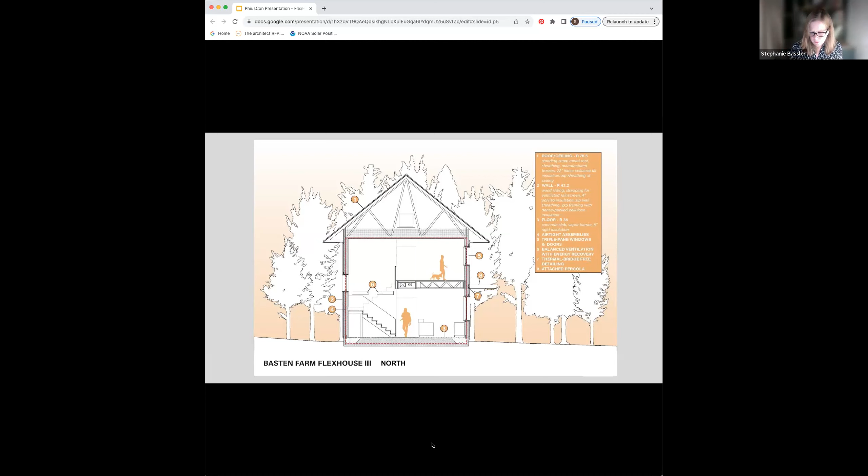So truss roofs and as much cellulose insulation as we can use. We haven't had the opportunity to use wood fiber rigid insulation yet for cost reasons, but are looking forward to having a look at the TimberHP products for sure. So these are two different projects - you can see we're just repeating these ideas because they work.

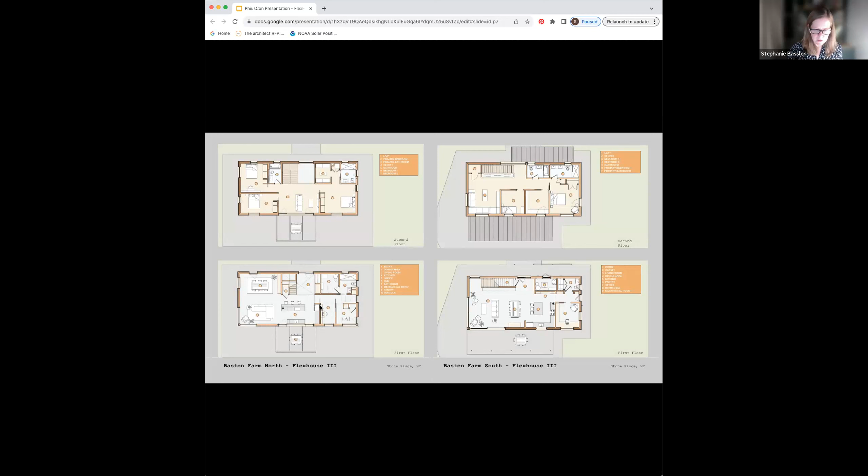These are intended to be floor plans. One project is on the left, the other house is on the right. You're just seeing variations on a theme, with overall very similar building volume and look to the houses, as you could see in the first slide.

As an example of the requirements for each project, there's a compactness requirement. The building has to be relatively compact; it can't be quite extended or have a lot of articulation. That's measured by a ratio of the external skin of the structure to its interior volume, and you have to hit that target.